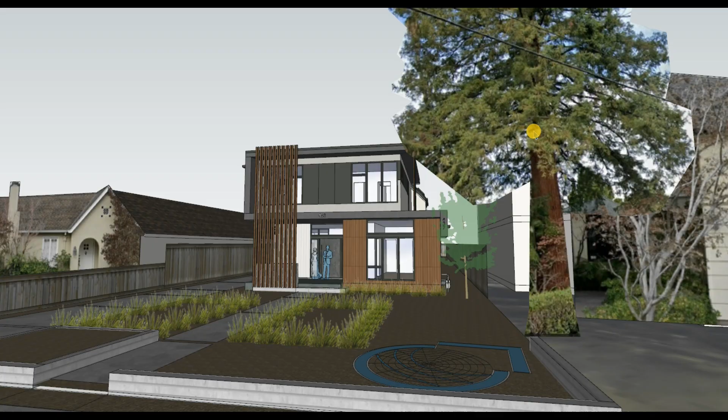This is the updated or overhauled 3D model that matches the overhauled floor plan that we worked on together that really was all about cleaning up this side of the home. So I don't want to bury the lead, I just want to show you really quickly what this side is looking like. All the walls here and here, these walls are in plane with each other.

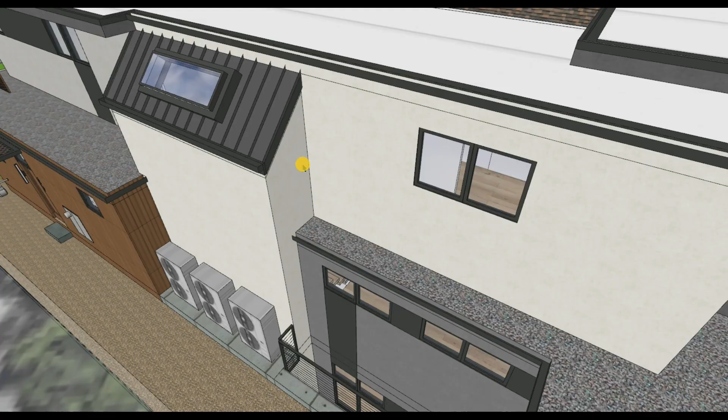Things are a lot simpler in terms of the roof plane and the daylight plane. Now the only sloped roof happens here at the daylight plane, or at the staircase and the elevator tower. But we've still got some really good daylight happening through a skylight that I'm proposing up here.

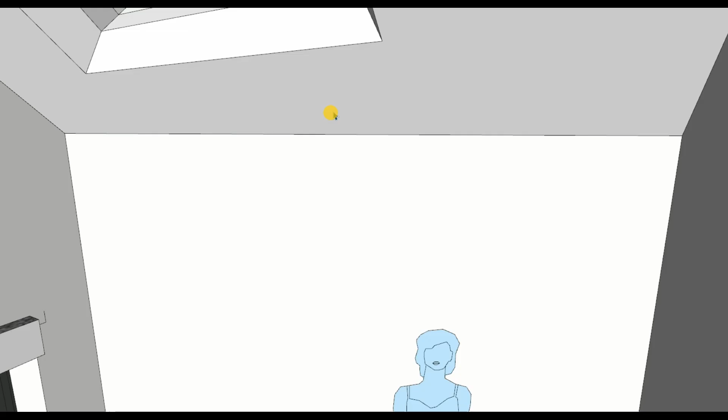And we are still left with quite a lot of ceiling height, and forgive the messiness in here, but this is quite a lot of ceiling height at the upper landing here. If I look at this, we're left with, I'm going to call it 8 feet. It's 7'11", but it's just about 8 feet. And when we get to the top of the stairs here, we're coming up at 9 feet. So I think this looks pretty good.

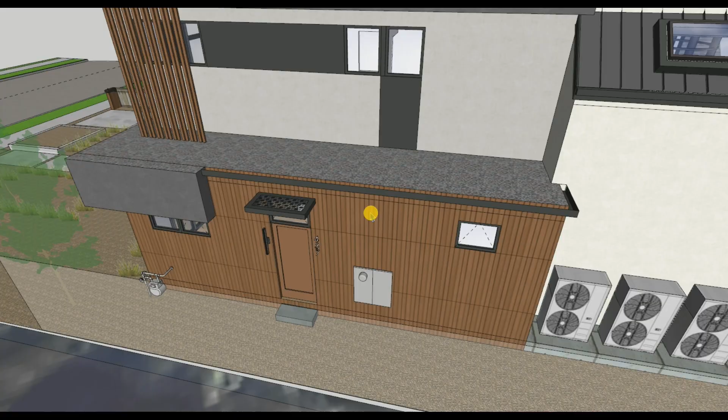The ADU, or the junior ADU, I should say, hasn't changed much, but the porch design here and the kitchen design, all that is a lot cleaner. And if I show in blue the previous pre-overhaul, you could see we had a sloping roof at the stair tower, but then we also had a sloped roof at the walk-in closet and a sloped roof above the dining room porch and the dining room itself.

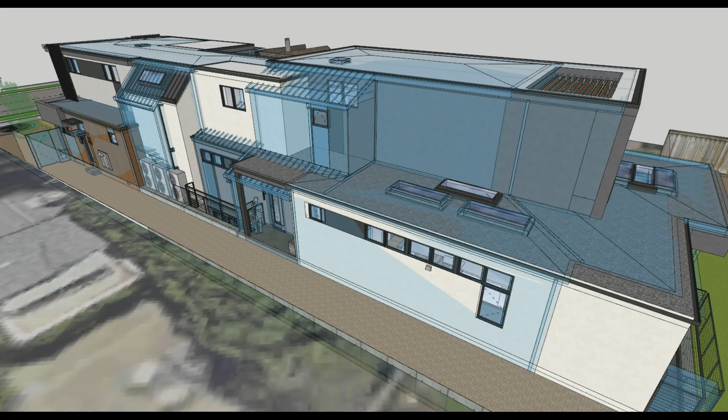But taking away that layer, you can see the walk-in closet's a lot cleaner. The porch and the dining room itself is also a lot cleaner. This will just be flat roof TPO to an exterior gutter.

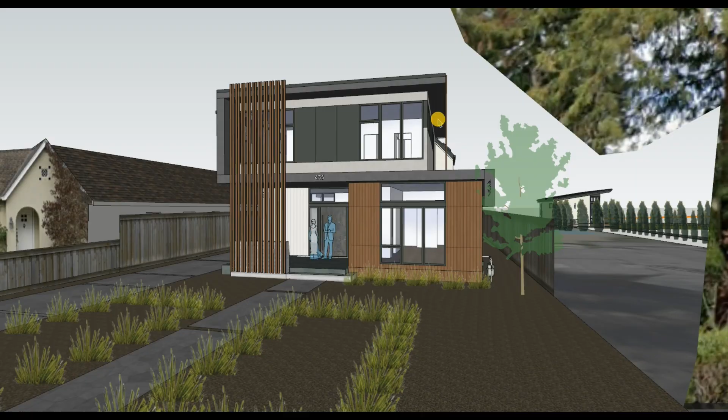Okay, now this is not the most exciting side of the house, but I do think I've done a very good job of keeping what was really interesting about the character of the home from before, while also really simplifying the number of wall corners we have and what's overlapping with what.

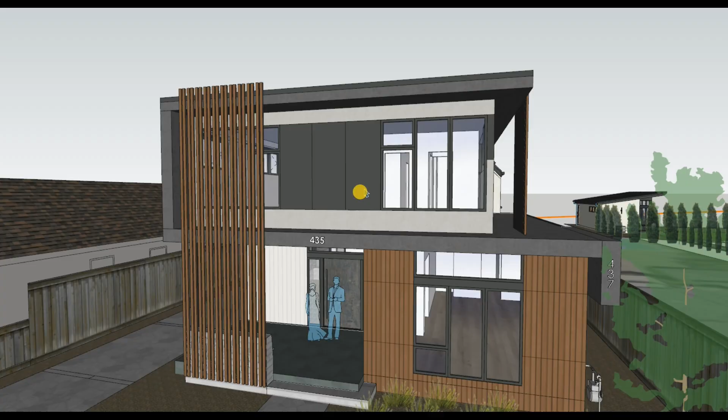And I know we were going back and forth about should this wall upstairs be offset, but right now I've got a single plane wall with a lot of glass for both bedrooms, but an accent material, which is probably just going to be smooth stucco, painted black, just like we've got everywhere. A lot of places we've got corners, or we've got corner glass, we're going to fill in with an accent material there, here. A lot of places where windows connect, we're going to have this accent material. So we'll do it here at the front.

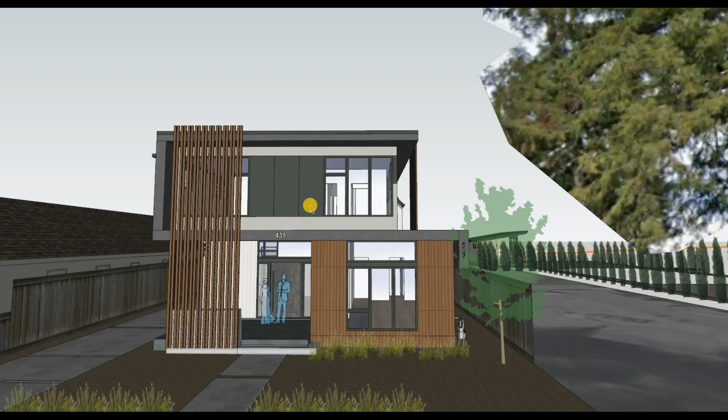But then I've done something really, I think, interesting with the overhangs, where we've got an overhang on the right side, but there's no overhang on the left. We've got a little bit of wall trim that comes down. We've got this really interesting movement where the roof comes down, turns into the wall, comes back over as the roof, and then finally dies down here as just another little turn down, which I think is really interesting. And I don't take it all the way, just enough to cover these windows and engage with this screen element here.

But it also gives a nice opportunity for the city mandated junior ADU address. So we've got the junior ADU address, the main home address will be bigger and bolder, and then we've also got the detached ADU address, which I haven't modeled the detached ADU yet. But the city required all three addresses here. I think it's okay.

And so we've got this interesting shape going on with this stucco trim, stucco and gray here. But then I wanted to retain that screen element. It's a lot simpler now. We'll just have it be adjacent to the surface here of the trim here and here, and then come down along the back side. I think this is still a nice feature.

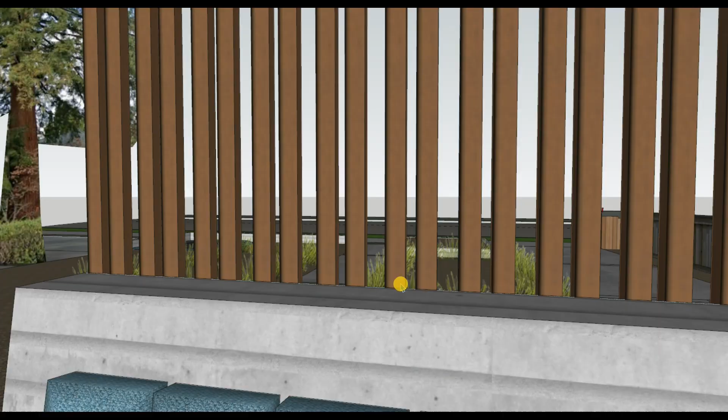So this is retained from the original design, where we have this poured in place concrete accent wall that will also hold a bench. And that gives this covered patio a little bit more function than just having guests come in and out. And it's a little private too. I could see myself putting my feet up here and enjoying a beverage and a book along this quiet street, especially with this screen element here.

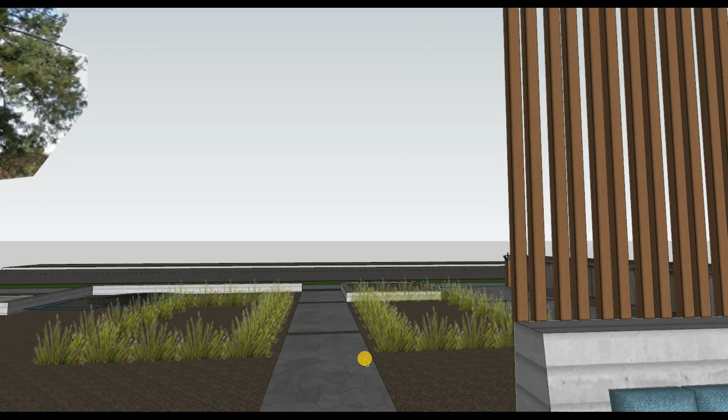But again, we've got these walls here in plane, and again, it's also in plane here in the long direction too. So this wall stacks here quite nicely.

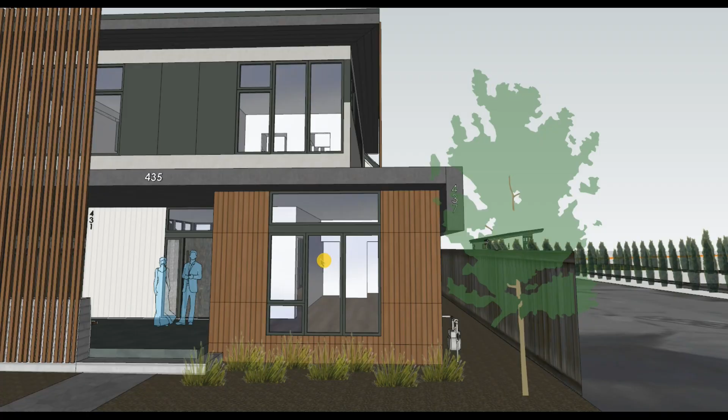And you can see also at the front JADU here, which is more like an office space, I'm going with a simple 3-panel window design with an operable window here, just like these bedrooms have, operable windows here and here. And then doing a corner treatment. And to keep things simple and easy with the planning department and to speed things up, I'm opting to raise the sills of these side-facing windows. We had them down here at the corner before.

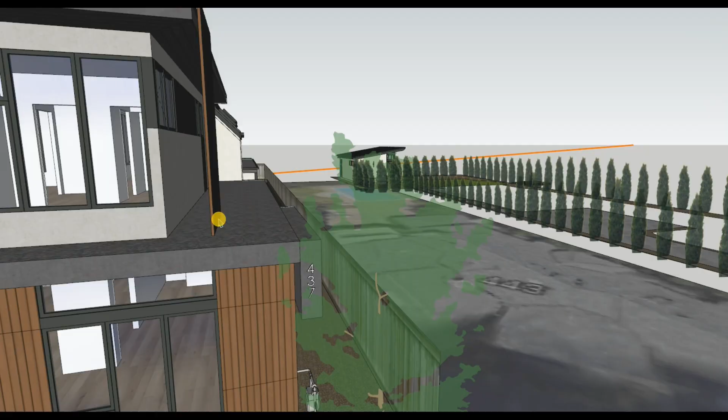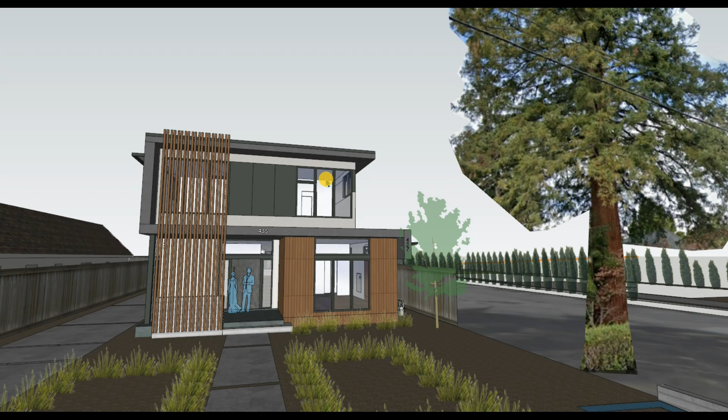And, you know, it's fine. I think from the inside, it's still really an awesome window configuration. We'll have an operable window here and an operable window here. I think it's really awesome this way. It doesn't need to come down, but I still really want this screen element. Is it absolutely necessary? No, but I do really like it, and it is the third screen. We've got 1, 2, this big one, the main one, and let's not forget the third one back here, which is a mandatory screen for this large balcony we have for the master suite. So I say let's keep it.

I also really like how in elevation, this 3-window configuration, these 2 here stack directly over these 2 here, and then this one comes out 1 more further to the right, and this happens to align with that. And I just really like that geometry. I think it does something neat. And I'd like to think that maybe this will be the mock-up side. This is where you guys can figure out the exact spacing of the screen and all that, and then we'll execute it at the more important screens, second and third.

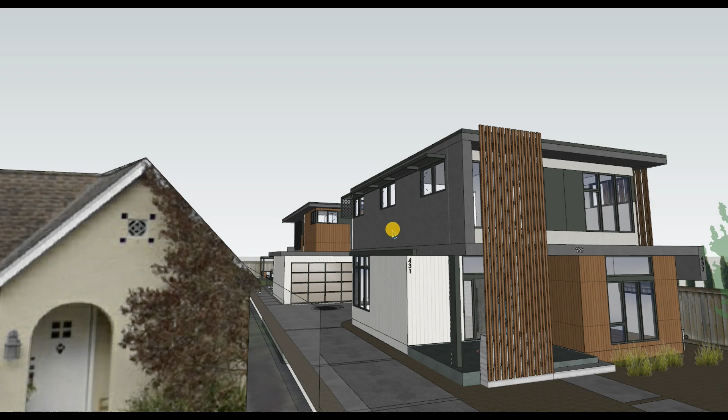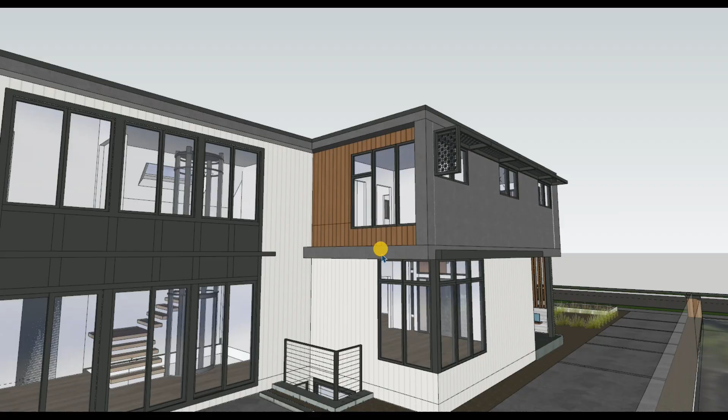Okay, so I really like this elevation. I still like the covered porch. It's very, very clean. One thing that was a bit challenging for me was the potentially less interesting facade we have here. I am trying to go with all 9-foot ceilings here just to keep the roof simple and keep the framing simple. But I think I've done a decent job of keeping this C trim, this C shape interesting, but then alternating the materials here. I go back and forth on whether or not this wall should be that wood accent.

I kind of like it as the wood accent, if only because it's visible from the master bathroom. So when someone's in here in the tub, which I haven't placed yet, you see a nice little accent. It doesn't have to be this, of course. It could be the white siding again.

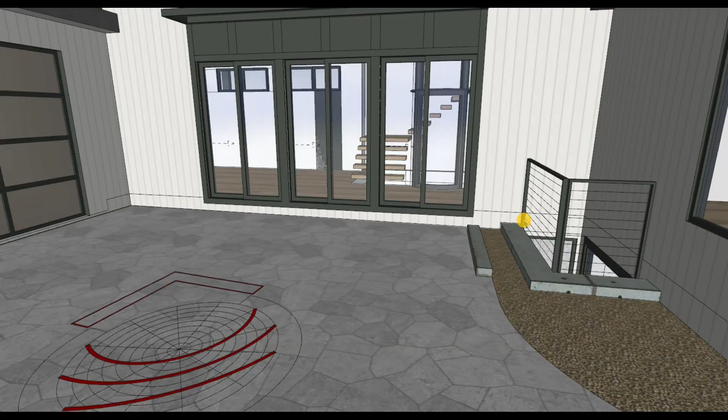But we've got plenty of back-up space, right? So, I mean, we're coming in here. This is really the driveway, or where our car's going to park on the left side. This is more of that workshop or storage side. But I do think that this could be a pretty attractive design. We'll put a wheel stop here, and then we'll have some plants here that go over the bumper space. That way no one ever has to feel like they're going to risk bumping into and ruining this guardrail or this glass door here, right? This is not exactly meant for vehicular traffic. It's meant to be more of a nice thing visible from this dining room space.

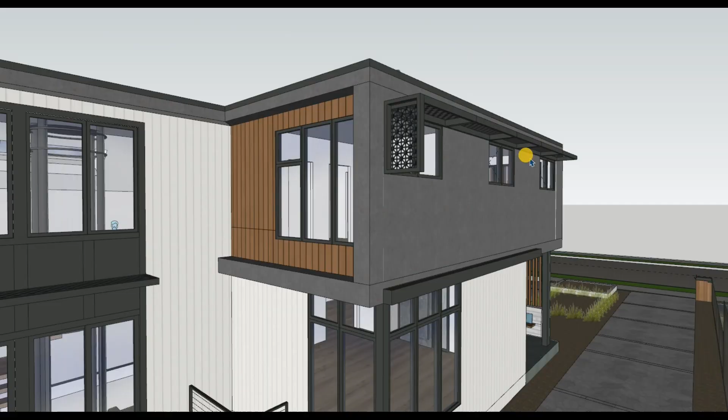Another thing I tried to do to jazz up this side elevation here, especially because this is a south-facing facade, I wanted to get some overhang over here, but it was more important to me that I have this sea shape. So I let there be just these ancillary metal awnings, these trim elements that I think you'll like a lot, because you pointed out something like this on a similar home in Palo Alto, but instead of having 3 individual shapes for the 3 windows, I thought it'd be better to tie it all together with one.

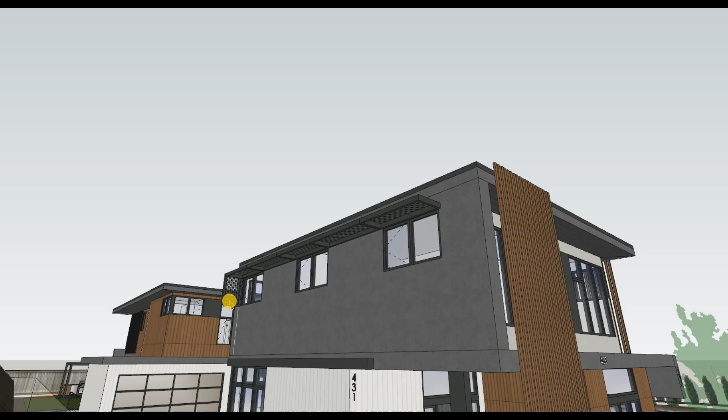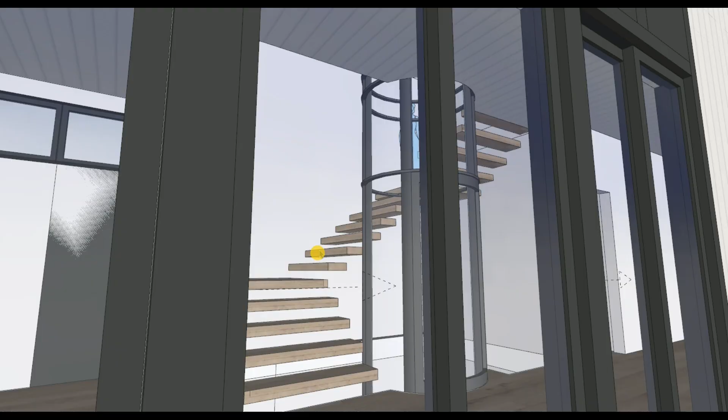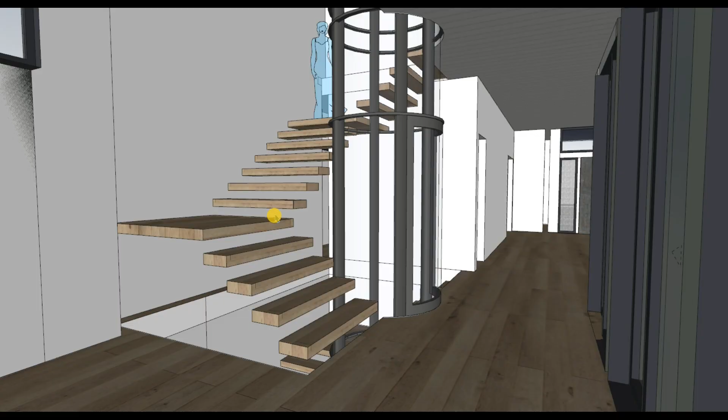And then looking at this elevation, no changes here other than seeing into the, dare I say, more amazing stair and elevator tower, right? Because now with this elevator shaft in the center and the stairs wrapping around, now forgive me, no structure is shown yet, no guardrails, but the steps are at the right riser height and count, and it's just freaking amazing. Look at this. This is so awesome. What a shame we have to have guardrails, right? Why can't people just be trusted to go up the middle of floating steps. Anyways, I'm really, really excited about this change.

But this window configuration hasn't changed. One thing that's different is there is now the wall that enters into the master suite. I mentioned that I was a little concerned about what that might be like in 3D, but to be honest with you, I think it's fine. We're seeing the doors that'll be here for the walk-in closet, and there would be a door here for the master suite, but I think it's fine. And I really like, though, that from the master suite, we're going to have windows here at the end of this hallway, brightening up this hallway, even when the door is closed. That means a lot to me.

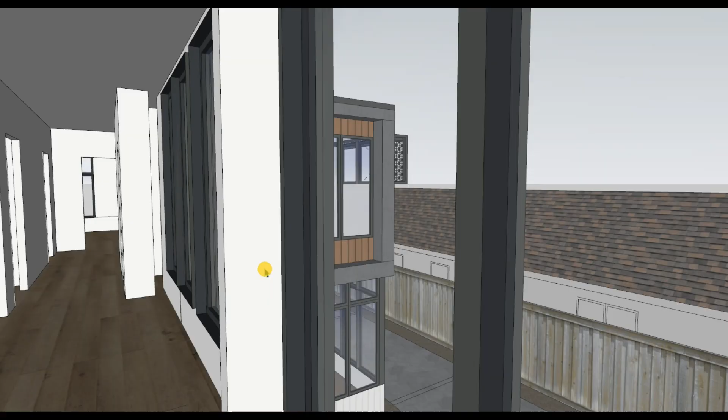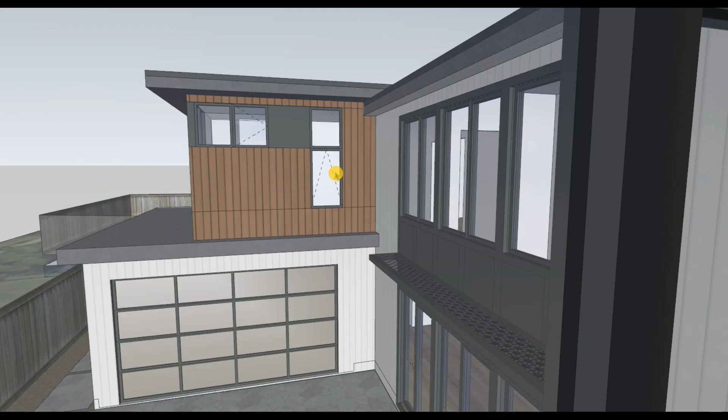But from this bedroom, you're not really seeing much other than the tub, right? The tub has this really low window that I like for when no one's in the tub, but when someone is in the tub, it's simple enough to raise up a bottom-up shade, a Roman shade, to protect privacy while using the master tub. And from the hallway too. But I think the master suite, or the master bathroom, is well protected.

So the material palette for the master suite is more or less the same. There is now this wall bump here, but I think it looks handsome. The master suite has a deeper overhang as we've moved towards the back here than we've seen over here on the front. But I do really like it, especially for what it does at the back. Now, this is a little bit different.

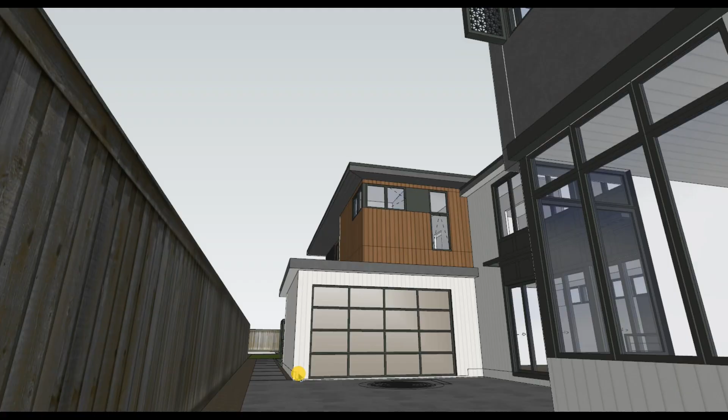At the garage, which now doesn't have a door on this side elevation, it's a very plain garage elevation now, and I don't want to walk past 20 feet of nothing, so I did opt to bring an overhang here. But this overhang is really high up in the sky, just about 10.5 feet up, so it's not really going to feel like you're getting choked down in this space.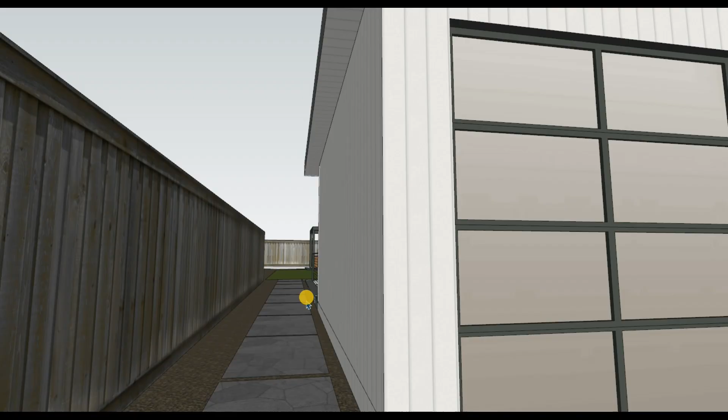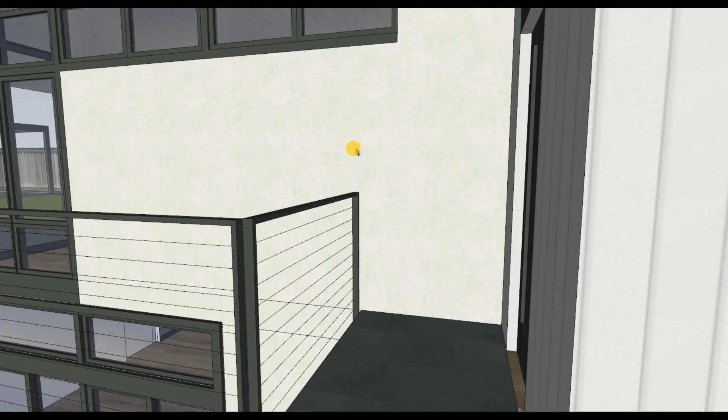But we come through here, and we're not seeing the ADU yet, but when we get past this garage corner, we see a hint of this step-up porch to get into the garage. But then we're also seeing how transparent and open this corner of the family room is. And we're seeing down into the basement. And you don't really see much.

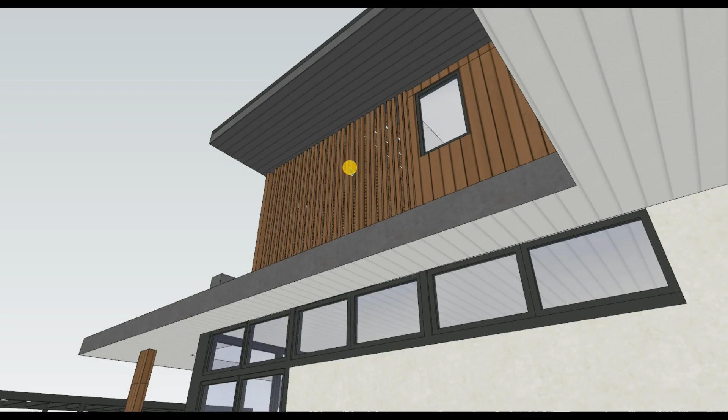I think in real life you'll be able to better tell how bright the master balcony rafters are, and how much brighter they'll be in between the vertical slats here. So this is going to look really, really dynamic and beautiful, much more so than is being expressed through this software that does not know how to bounce light well enough. It could, but I have to wait like an hour in between each move of the camera. Not worth it. I love the same window design we have before.

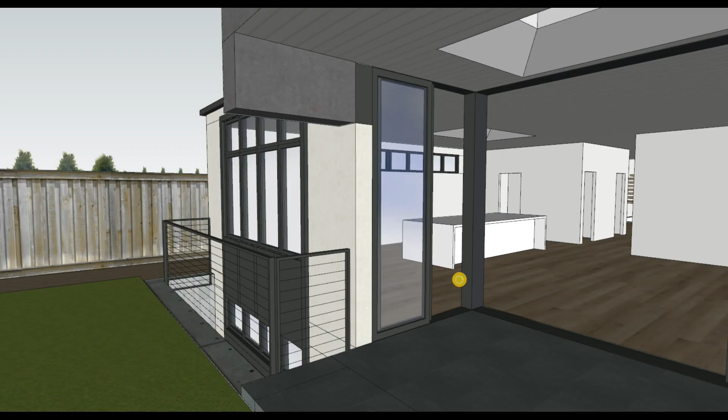The doors here at the corner of the family room and the much larger nook still pull away from a corner post. I still think it may be worth it to perhaps consider eliminating the post and go with a true inside corner sliding door system where the inside leaves meet each other, not at a post. Looking at this with fresh eyes, I absolutely want to see that.

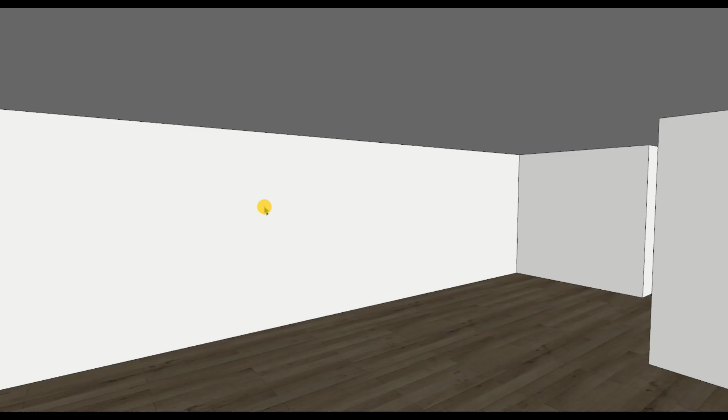It's hard for me to mock that up right now. Maybe I can do a relatively decent job of it. Look at that, I'm doing okay. All right. Oh yeah, look at that. That'd be so much better, wouldn't it? Okay, yeah. So I think that is a lot more powerful. And in reviewing the structural plans, the engineer didn't really even make much use of that post, I think. So there's not that much annotation around. So I'd really like to see this.

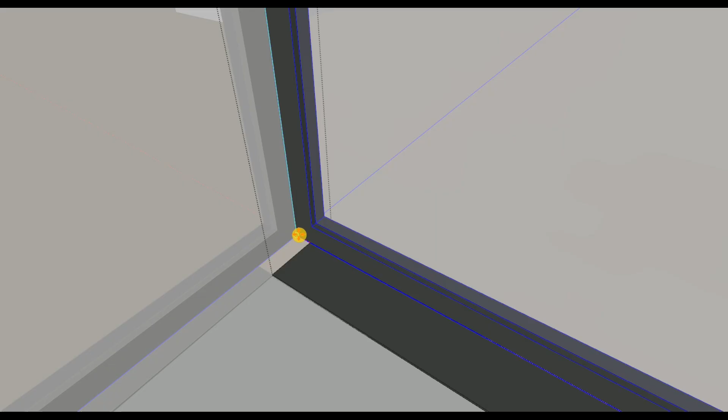And so what would happen is this door would continue sliding over until it met that one, and this one would continue sliding over. Actually, I think more like past this line, like that. And it's gonna look a lot better. So yeah, let's do that, I think, if you're okay with the added cost. It is a much more expensive door system versus these two.

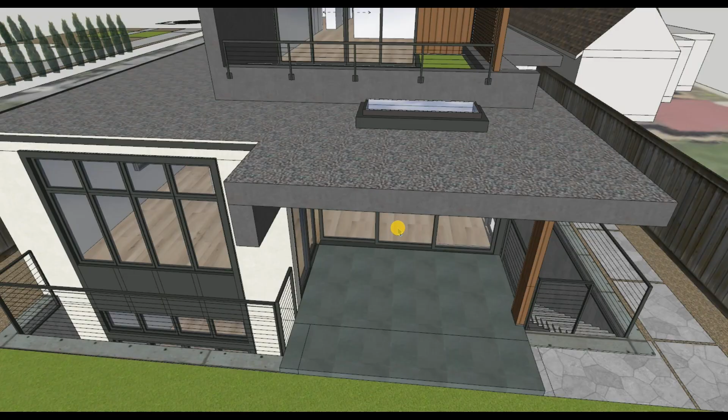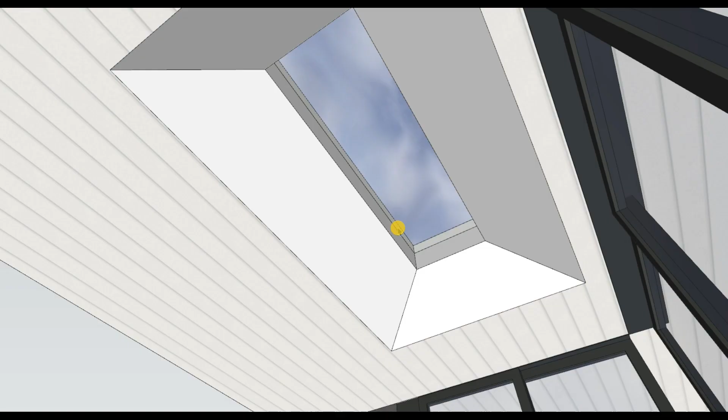But in either case, the doors have also gotten taller to reflect the slight ceiling height change we had. And I've opted to go with just one skylight here at the covered porch, same as with the kitchen and the stair shaft. So now the stairs, the kitchen, and the covered porch all have the same long single skylight with a flared shaft, because you know I'm a sucker for repeating motifs.

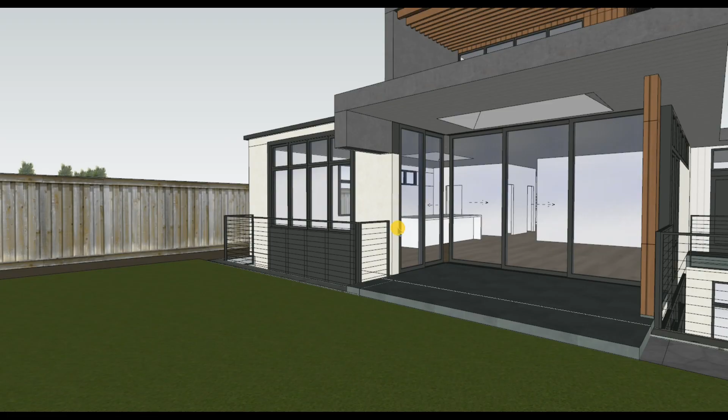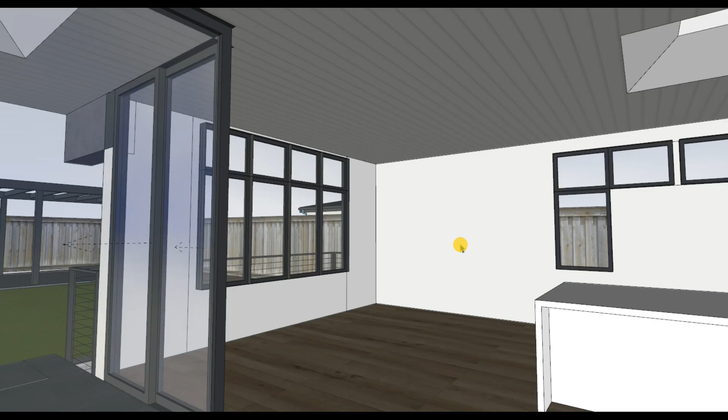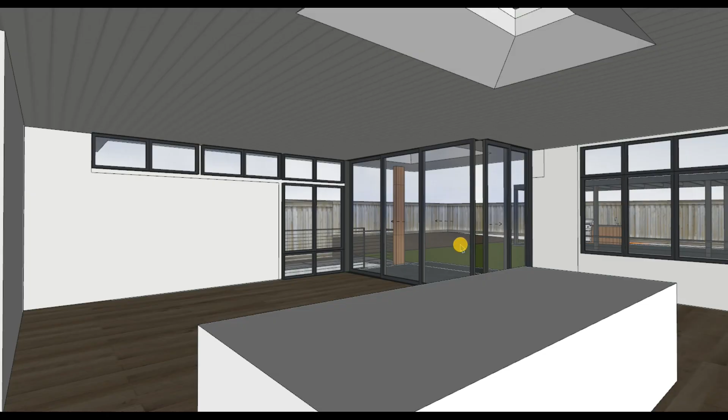So as we come around the back here, we're starting to see the simple kitchen and nook volume. There's not much going on. I've opted not to put any additional windows here behind the nook and let this be a big feature wall, perhaps of stone or maybe a fireplace or something more than just more windows and glass. Because I do think, dare I say, I have an abundance. I have a lot of glass down here. I love it. I'm very happy with it. I don't think I'm overdoing it. And hence not trying to cram in more windows down here.

The kitchen isn't mocked up yet, but the stove's right here, centered under these two. And then we've got countertops coming up to this window here. This one would be operable. But then a lot of powerhouse kitchen happening over here with double-high pantries and refrigerators right here. And so I would imagine this whole volume would get built out and feel more like this, just a little bit cleaner.

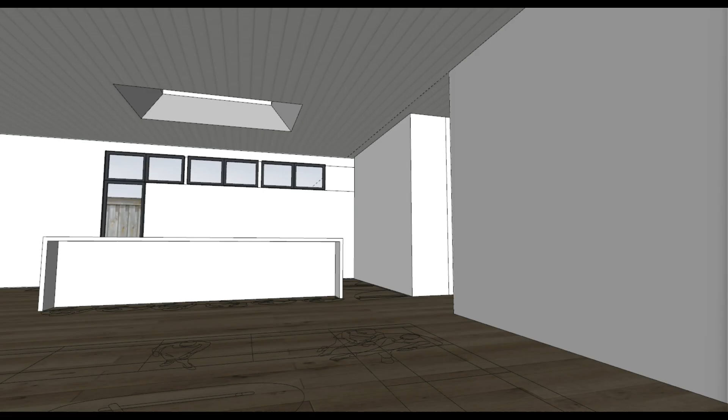It's not quite in line with this corner. I think I'm okay with that. It's not the end of the world. Actually, I suppose we could just build this out a little bit fatter. Just another 6 inches deeper. That might be nice.

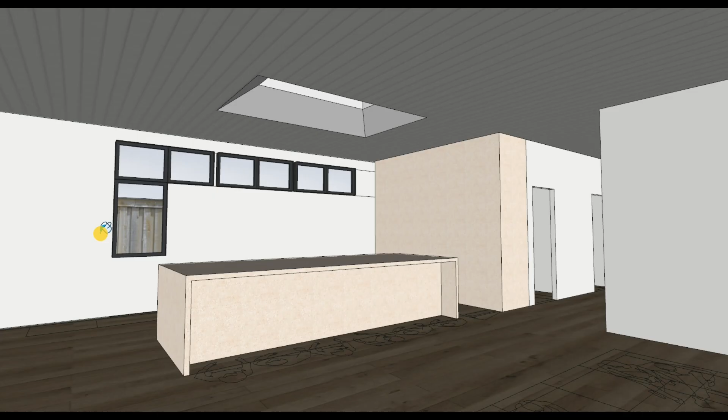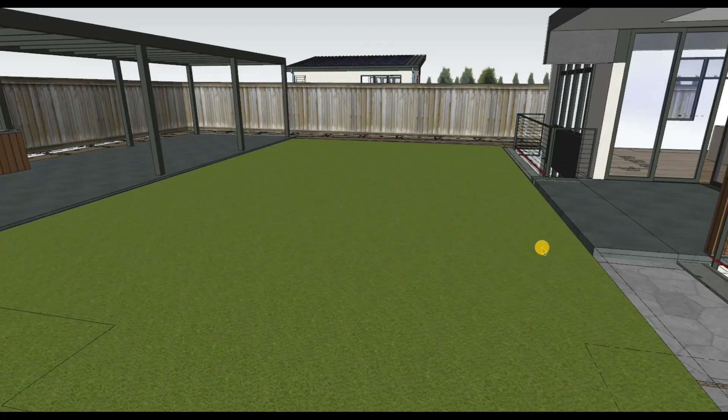But yeah, anyways, again, we'd see the ADU through here, but look, there's a lot of grass here now. Between the edge of this retaining wall here, the retaining wall set the depth of the porch and the porch overhang, but between here and this detached structure now, it's over 26 feet, maybe 27 feet to the posts. So that's a lot of green grass now. I think you'll be very happy with this.

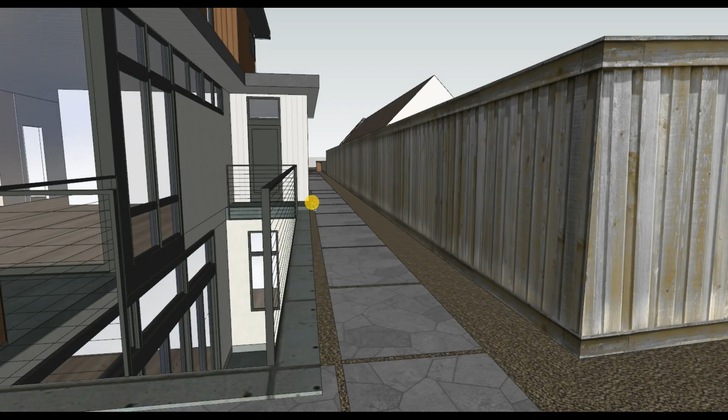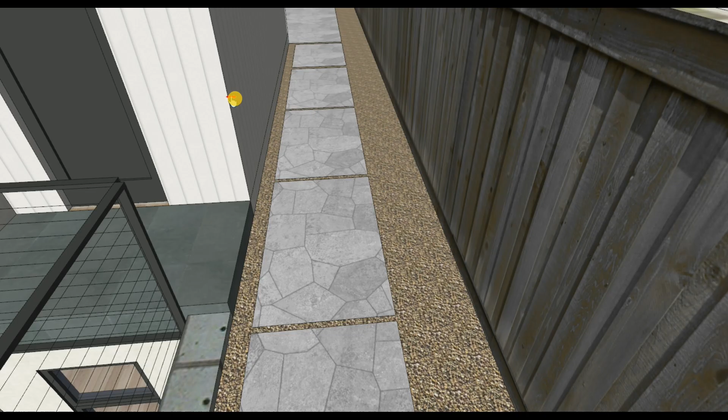And, you know, there's a lot of space. I know we've got to get plantings in here, but I feel like there's a lot of space here between this side-mounted guardrail and the fence. And again, the fence isn't really true thickness, but it's like 7 feet. It is 6 feet here at the garage, but of course, this is only to the stud. You know, there's still plywood finish and siding, and this has some thickness, so it will be less than 6 feet real, plus the plants. But I do think, especially given that it's only this length here, I'm really not too bothered by it.

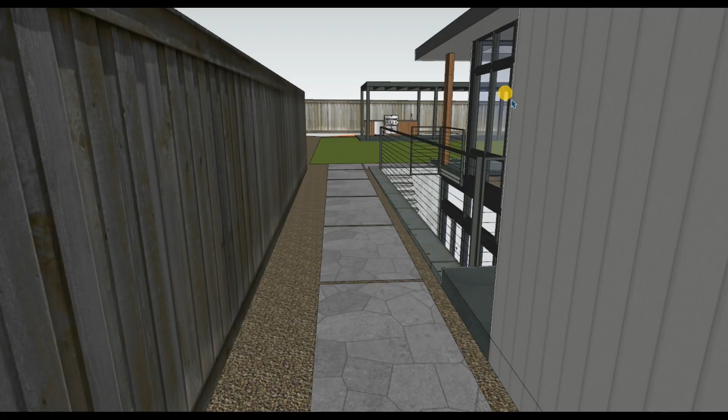Especially because once we get past this corner, even before we get past the corner, we start to see some really interesting things happening and opening up. And I just really think this is a very special area. I think an accent light needs to go right here, perhaps. Okay, let's see, what else do we need to see? So let's go take a look at this side again. So this is very clean and open.

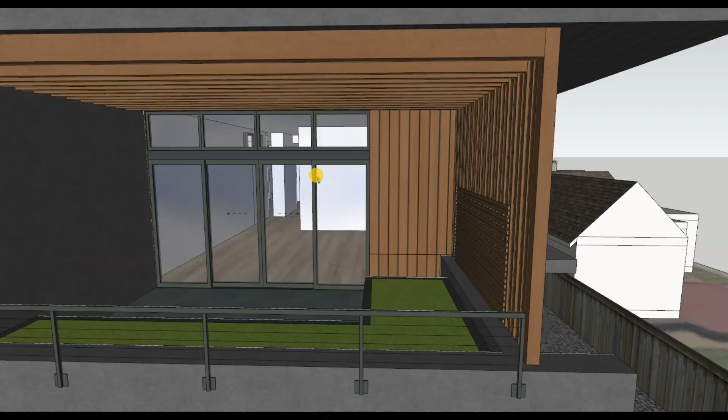The master bedroom hasn't changed much in terms of design. We still have a large opening at the balcony cover, so that doesn't count against our square footage. And I'm showing this dense wood screen. That's what planning requires, so be it. It's a little busy to me, but it's worth it, I think, to be able to have this open screen motif here.

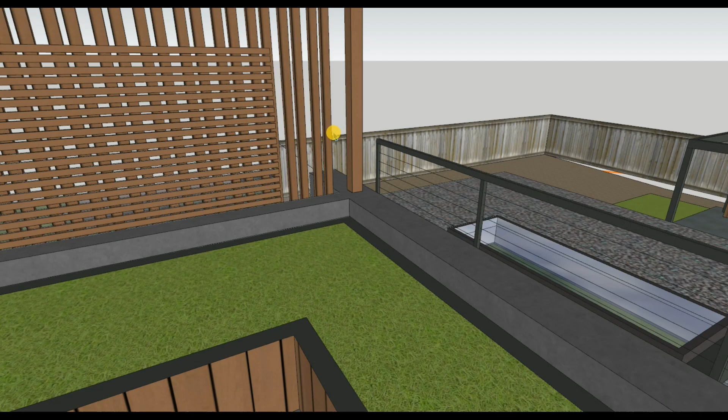And then we have this large planter area as well, because planning doesn't want you guys coming all the way to this corner and looking out onto your neighbor's property. They want instead for you to be screened from that a little bit, and I'm okay with that. However, if the buyers wanted to fill this in, I think that'd be nice too.

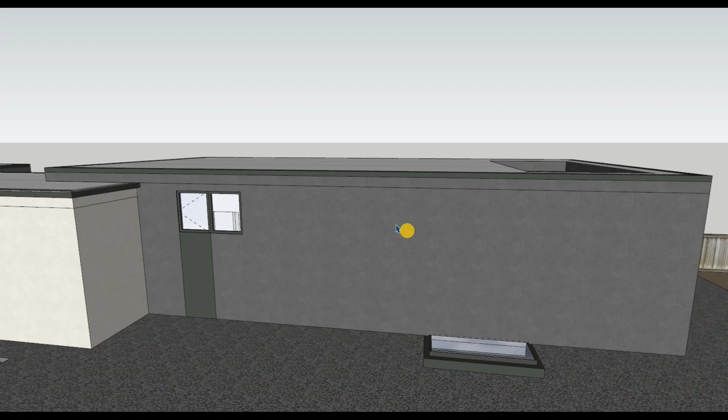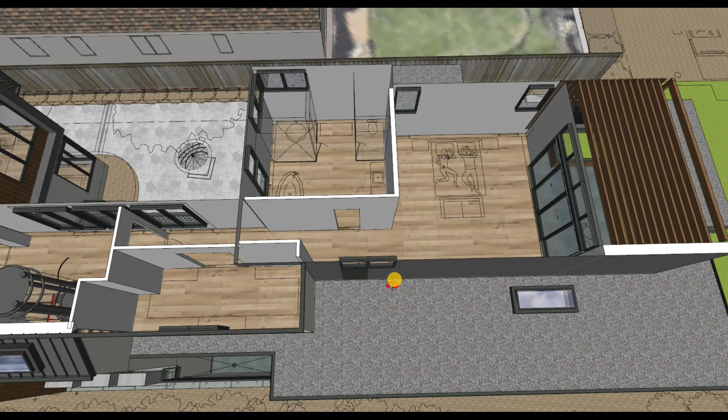No openings along this side, no openings here in the master bedroom, although I am showing a pair of windows here over the breakfast bar, the coffee bar area, the wet bar in the bedroom. I think that'd be really nice, especially since we're going to have a little bit of slat wall happening right here. It's northern light. We're not going to get much shadows through that, but bright light will cast shadows. So if the rest of the room's darkened, we could get some nice light happening through those slats.

The walk-in closet has a pair of windows right across from these doors, so when these doors are open, even more light's coming in. So though this is a long hallway area at the master suite, I think it's going to be nicely lit. No windows in the stair tower. That's okay with me, especially because of the skylight happening here. So I'm really okay with it.

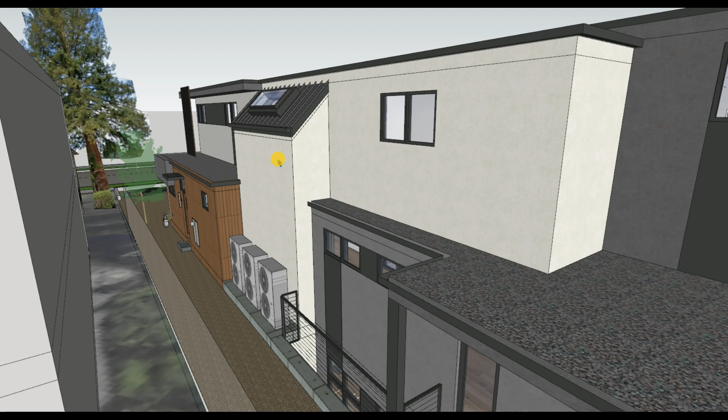But this was a leftover design from previously where I knew that you guys wanted to use these walls to run utilities and to bring things up. So no windows here. And I didn't squeeze one here on the side either. The dimensions are different. Felt too forced. I'm quite happy with the skylight happening.

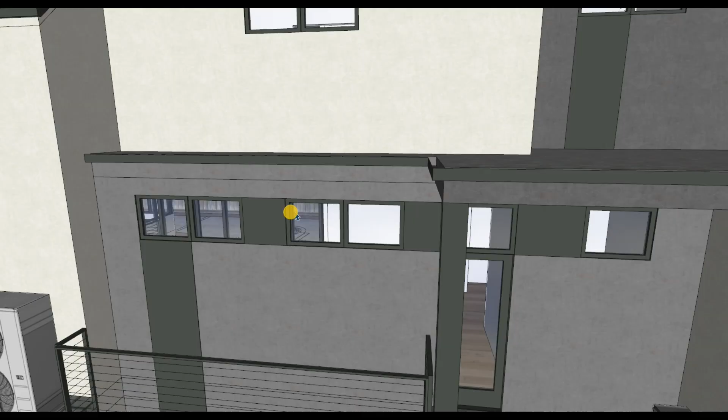But then here we're seeing a window for the downstairs bathroom, door for the dining room, and a window above, as well as a few more windows nicely spaced out for the dining room, as well as downstairs in the gym space. So when you come downstairs, you come down into this large opening area. It's a lot more open than it was before because the gym's no longer enclosed, but it's very brightly lit. And then we also have a window here for the bathroom. It's not too much, but it certainly should be frosted glass.

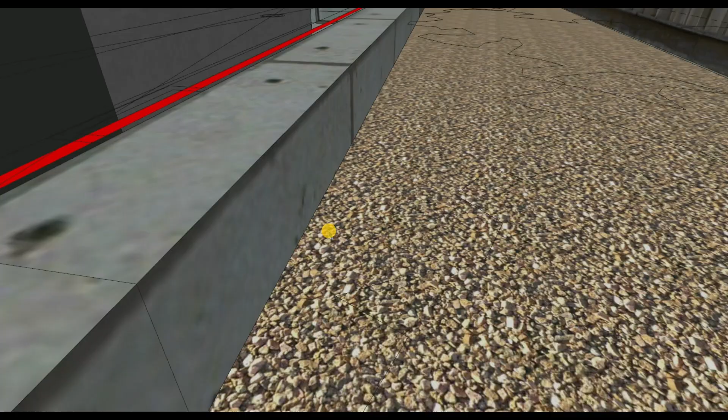I don't think... yeah, of course. People can be able to see into the shower area, so we've got to do frosted glass right here. Let's see how many of these do I have. I have 16 of these, so I'll make this one unique. And I'll go grab the same frosted glass that I have for this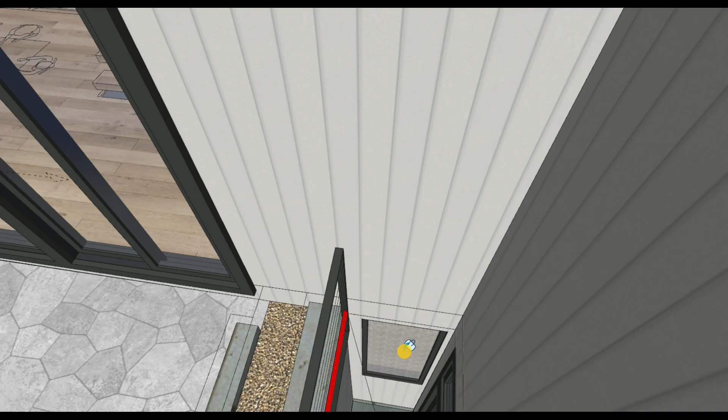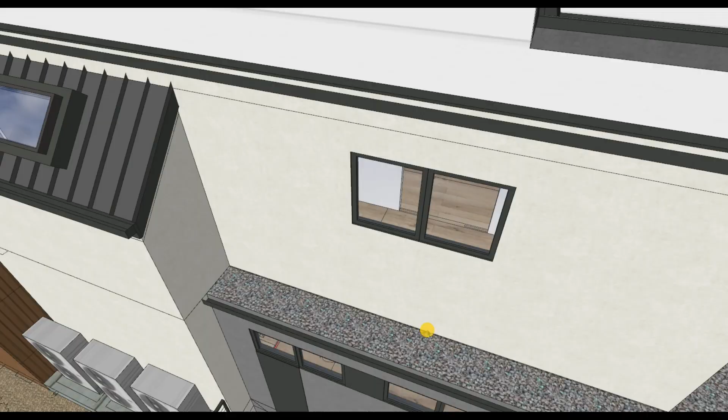end of the hallway. When you come down the stairs, there's a nice window here at the end of the hall, but I don't want people looking into the bedroom through that window that we have, or the sliding doors we have for that downstairs bedroom. So we frost that window, and we'll frost this window too. Which means perhaps I could make it bigger, but that's enough. Some light's better than no light, so I'm happy with that. Maybe I'll make it taller, we'll see.

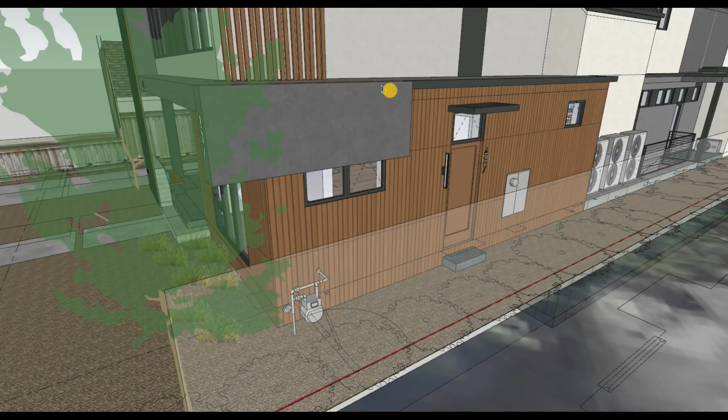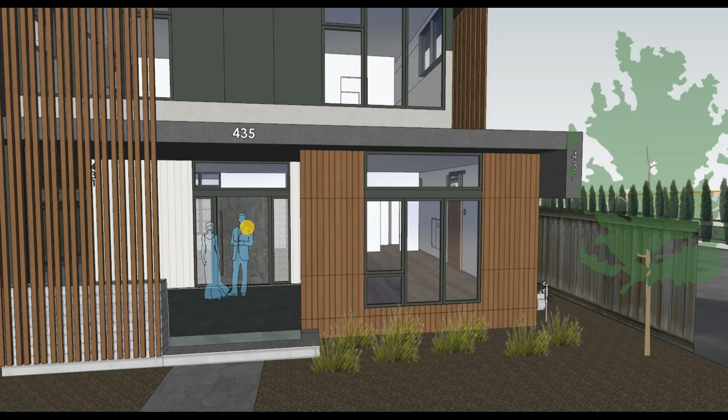And then coming along here, again, the junior ADU elevation is pretty simple. I have a window for the bathroom, no window above the kitchen because we'll get enough light through this transom window here above the door. So that keeps this area for the electrical meter pretty free and open. And then just a couple more windows here underneath this turn down trim element for the roof. And I believe that's the full tour of the exterior. But let's go ahead and take a quick look at the inside and just go down into the basement space.

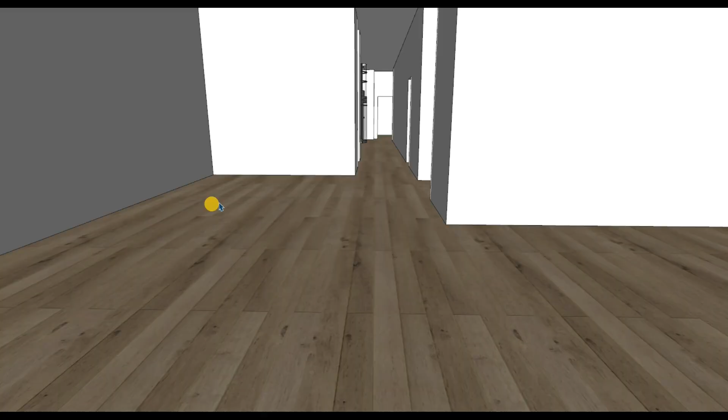So when we come downstairs, like I said, there's going to be a nice window here illuminating this end of this hallway, this alcove here that leads to the bedroom. But of course, we're going to get tons of natural light down here, as well as the natural light down here. And then finally, last but not least, all the natural light we're getting through here. So this basement space is going to have tons of natural light. And I haven't fully modeled the wine room and the bar basement and all that because really it's not what matters for structural engineering, which is what we should start next.

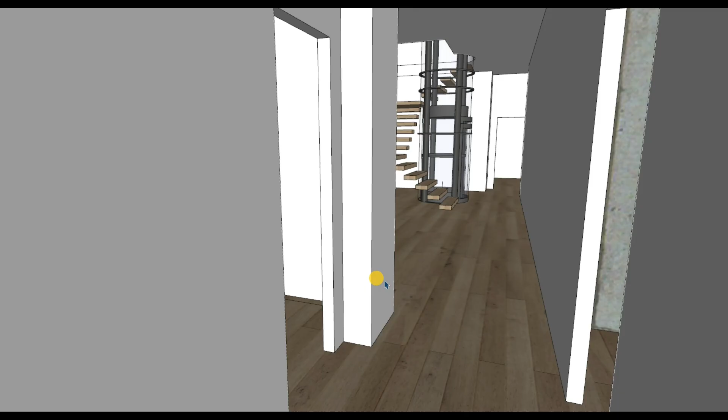But I like this huge home theater, which I should depress this floor. There should be a depressed floor there, but no big deal. We've got this alcove leading to the home theater. This alcove leads into that sauna bathroom. We got this wall here leading to the laundry and the utility room. And when people open this bathroom to the sauna, there's going to be some natural light coming in, high against the ceiling, illuminating this area nicely.

And then for this bedroom, it's fine. It's not too special. It's got enough light. It's a rather small light well, but we don't need much, right? It's better to keep the light well small in order to not overly impact the parking court.

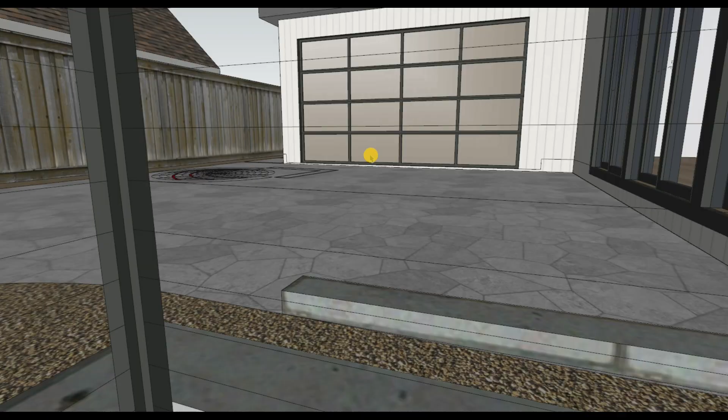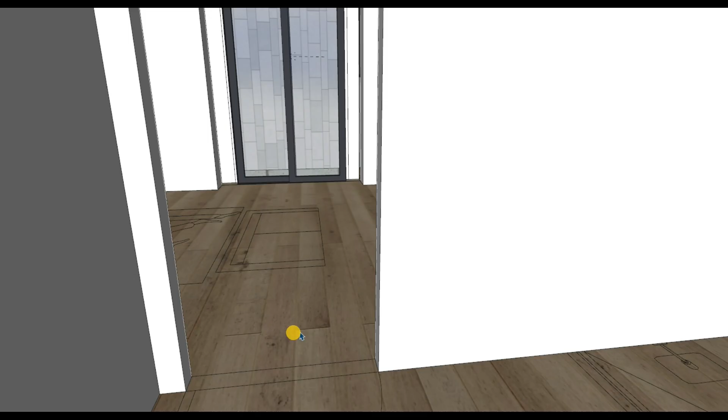And then, sadly, the bathroom down here is a landlocked bathroom. There's no access to natural light or windows, so no big deal. We'll just put some frosted glass in the door here. That way, the light that does come across the couch can make it into this space so that when we close the door, we're getting a little bit of natural light and we're not plunged into a dark black room. The walk-in closet, whatever.

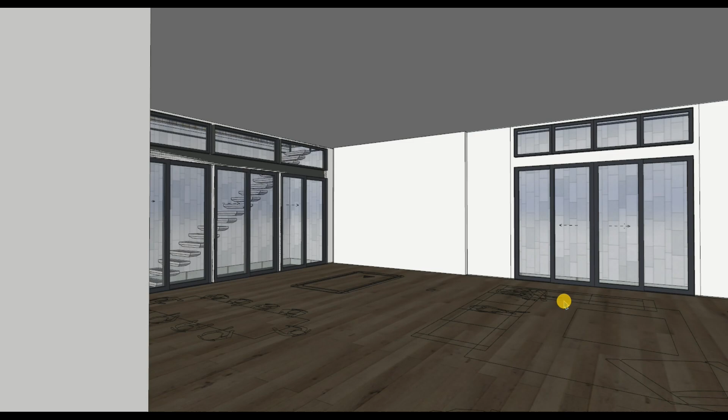Okay, I am really happy with this. I am eager to hear your thoughts as well. And if you like the general overhaul redesign, I'd be happy to do the next steps, which would be to further coordinate the CAD file and the model and get the structural engineer going again, get on their calendar for the rework. Mechanical, electrical will have to happen as well, but their turnaround times will be a lot faster. And I don't think they really have to recalculate much.

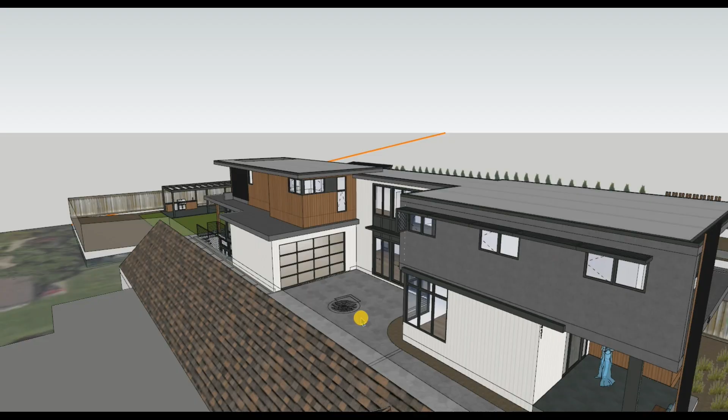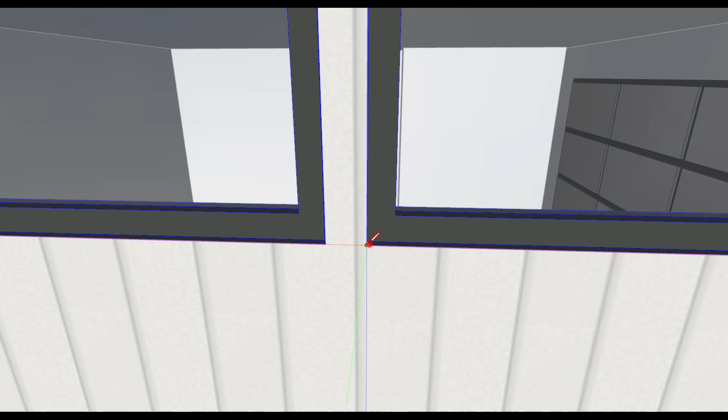You know, we haven't grown the scope at all, but for the structural engineers, every even window change matters, right? So this is completely different. You know, I suppose I should have some high windows on the side there. What am I thinking? We need some windows here. Okay, so I'll send you also a PDF of several views of this. It's not going to be too cleaned up yet or anything perfect, but I think it does a good job of explaining the redesign.

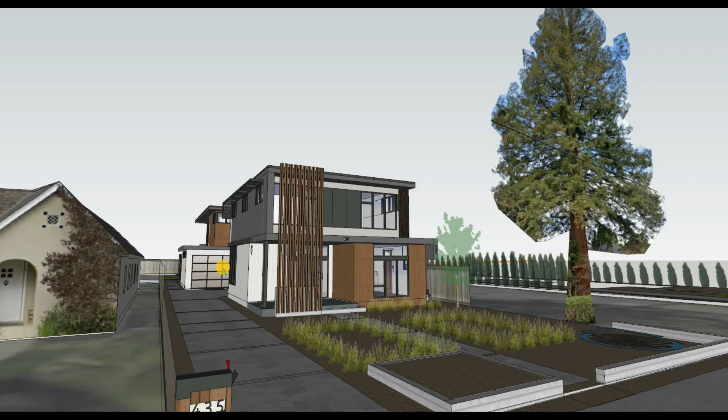All right, thank you guys so much. In fact, actually, I think I'll do one nice little fade out here to the front. Yeah, I'm really happy with this. It's contemporary. It's not overly complicated. It's clean and simple. And sure, there are some extra elements that could be stripped away, but my goodness, what a shame if we were to do that. I mean, it's not terrible, but oh my goodness, do I like it so much more with these few extra touches.